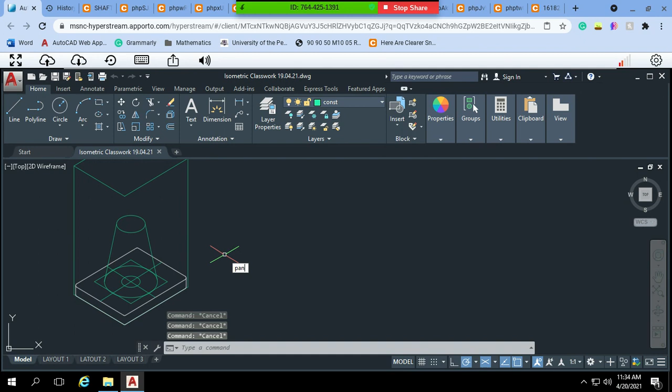Now let's look back on the question. You are to convert this image, this orthographic drawing, and here are closer images. I explained that the reason why you see me taking photos of the paper is because this past paper is so recent that CXC doesn't publish it, so I have to just take quick screenshots of their questions.

One second. Who's that? Makes sense. Yeah, that's Josh. Alright, let me put my camera on the screen, have to put it side by side.

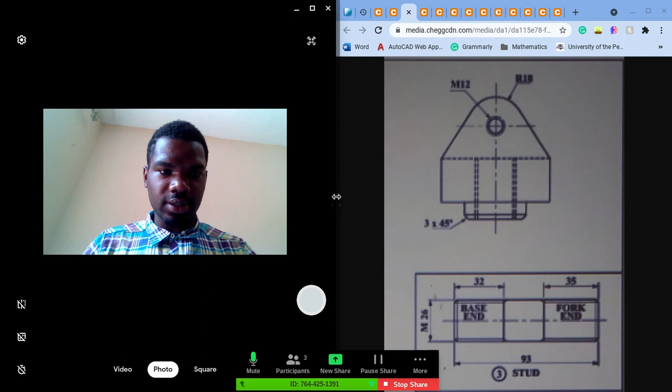There we go. Afternoon. Alright, good afternoon, Josh. How you doing today? I'm good. How are you?

I'm doing good. Let's hope that we can really reach some great progress in this drawing. By the end of the week, we should finish another coursework, which is going to be this isometric drawing. Alright, so just look at it for me.

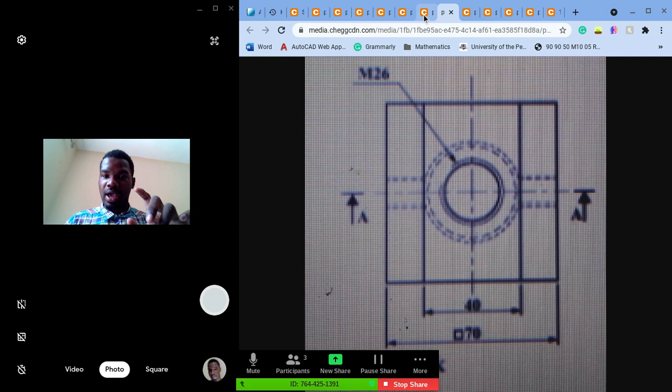So a quick correction. On the drawing, it specified some measurements as it relates to the fillet. I thought it was 3 millimeters, but it's actually 5 millimeters. So you're gonna change that 3 millimeters to 5 for me.

A simple way to just change the fillet would be for you to extend the lines back to original. There we go. Then you can delete the curve, type the command fillet, specify the radius to be 5. Now you can do the fillet once more, and you see the large difference. Understood?

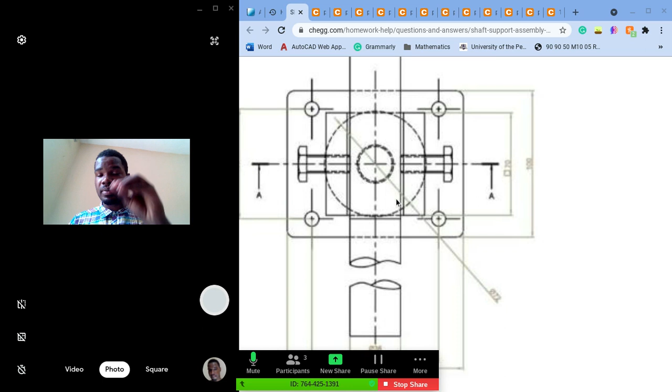Alright, so the metric of the inside is what I'm going to be designing now. So pay attention for me now. Yesterday we got the base. We said that you went 70 out on both sides. And then to find the structure, you went 40, which is 20 on both sides. And then you connected it back to the base, and that would give you this distance that you see.

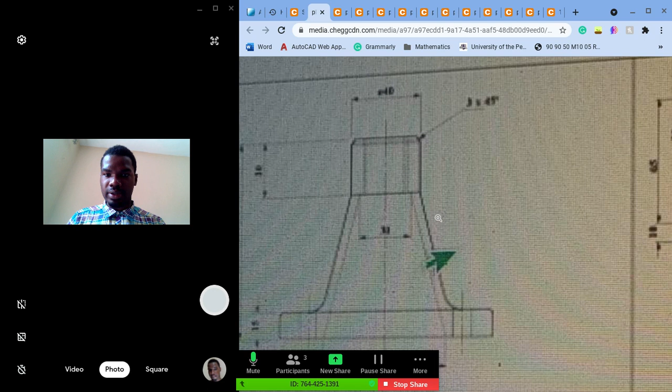Alright, so once we have that down, the next thing to design is going to be this vertical component that goes up to be, is that 16? Let's get a clear image. It's 30. So we're gonna go up 30.

Alright, let's see who's that. That is Corey. Good afternoon, Corey.

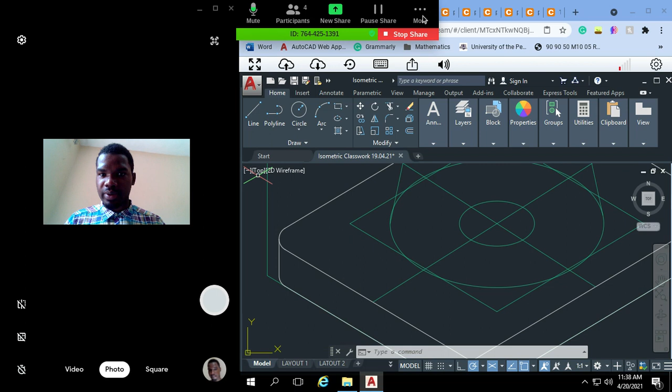So let's pan. P-A-N. Right, how do I remove this banner? I don't know how to remove this button, it's in the way. Okay, let me continue though. So PAN, there we go.

Let's zoom out. Now we're gonna go a height of 30 upwards. Line, specify 30 upwards. Okay, 30.

Okay, now you're gonna go into the midpoint of the circle. You're gonna also go up 30. Okay, and then you can just go across 15. Sorry, not 15, but the exact radius.

So what's the radius of the circle? Let's type distance, specify this point. So we're gonna go 20 on each side. So now we're gonna go 20, 20, 20 again, and we're gonna go 20 on the other side as well. I'm gonna go 20 across.

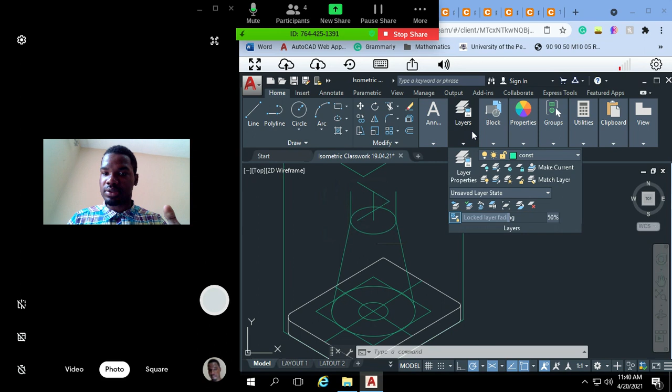So let me switch my layer. Let's just use the white line and then let's just turn off the blue line for now. There we go. But before I do that, I must transport what I did to the white line. So if you don't want to use the construction layer and you think you would go faster if you had just used one layer, then you can do that, but then you must change it afterwards. So let me just move this to the white line.

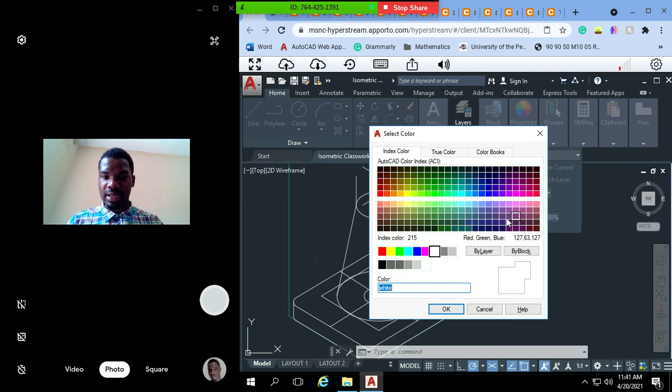Alright, now let's switch this. All you have to do is select that layer and now you can turn off the construction box. There we go. Isn't that hard, right guys?

So is everybody at this stage? No, sir. When do you want the work back? Friday. No problem, Friday. Okay. Alright, Dara.

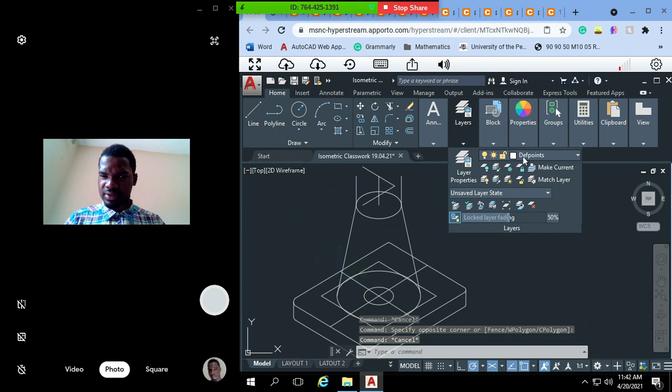Alright, for some reason I'm having connection issues because I can't select my lines, which is strange. One second, let me try to connect again. Alright, yeah, I still can't select my lines for some reason. Okay, there we go, let's continue.

So as I said, you're going to draw a box over this design that is in a radius of 40, and it has a height of 30. Let me quickly draw the box out here and then I'll place it on top.

So here we go, we're going to draw a line going 40 in this direction, 40 in this direction, 40 in this direction, 40 in this direction, and 40 in this direction. I'm going to give it a height of 30 beneath.

Alright, I'm going to go across now 40. Now all I need to do is place this box on top of the vertical cone.

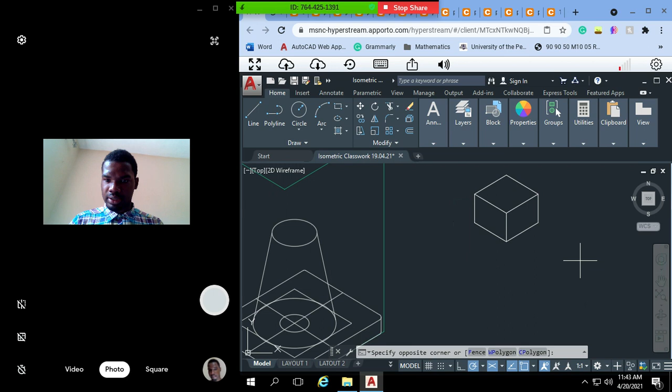Let's quickly go here, so I'm going to select this box right here. I'm going to move it, but first let me find a midpoint so I can have a base to draw with. Let me turn on the DSettings.

Is there anybody else in the room? Camera on for me, Khori. Camera on.

Let's turn on line. There we go. Okay, now I'm going to just move this entire object. Press enter.

Into the center. But you realize something, if I move it, I haven't given it its height. So what I need to do is move the base point from the base. I'm going to copy this midpoint line and place it at the base as well.

And then I move everything from this point. Press enter, select this point, and then I put it here. Any questions?

No, sir. Okay, alright, so let's look at another sketch now. So that's the overall idea, so that's the construction box for the top there.

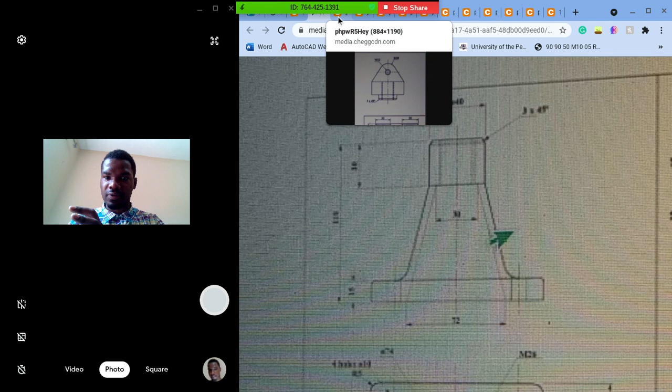Now as it relates to what is housed on the top, alright, here you go.

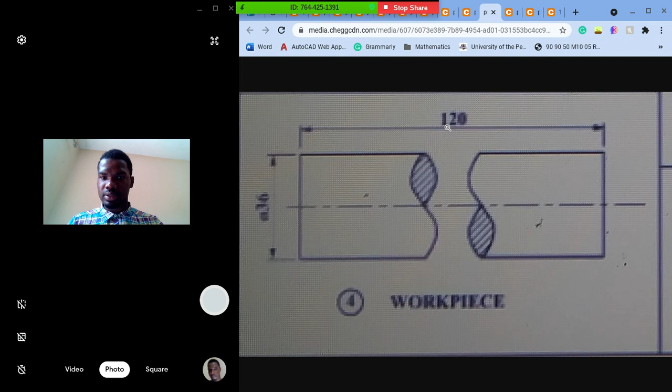Okay, now we're going to begin to draw this design. So let's start off firstly by looking at the next part. So the next part that we're going to draw is going to be the fork, that's part number 2. Okay, let's see if I have another sketch of part number 2.

Here we go, alright, so let's sketch. So what I advise you to do, Josh, Khori, and Patrick, is sketch each individual part by themselves in isometric, and then you just move each part and assemble it on the device itself. That's way easier. So I'm going to call on Josh now, and he's going to sketch this in isometric.

So I'm going to send you the link, Josh. Alright, so let's pan over. I'm going to send you the link and you're going to control my screen and tell me what I should draw, so you're going to draw on my screen. Let me copy the link.

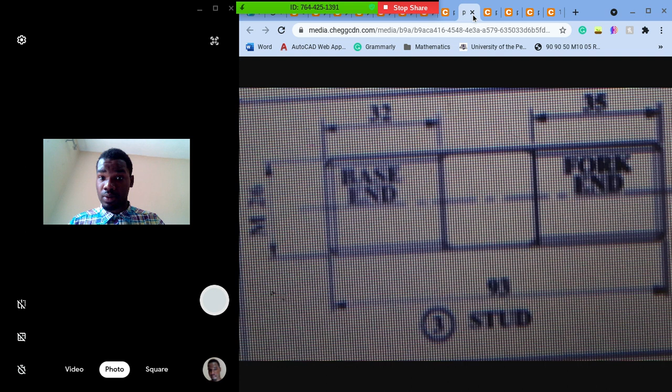Alright, there you go, so click on that link and now you're able to control my screen. What I want you to draw now, you're going to draw part number 2, which is right beside there. This is the front view, and this is the plan view. Draw this part 2 in isometric for me.

Josh, are you there? Yes, sir. Alright, so are you on the link now? Sure. Good afternoon, Zachary, are you on the link? It's loaded. Oh, so I just sent a link for Josh to control my screen remotely. There you go, he can control it now.

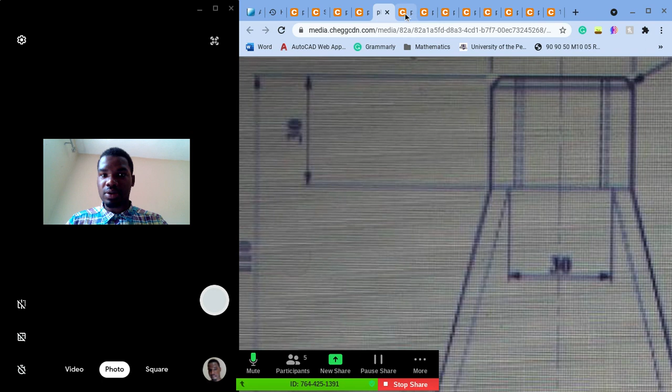So you should look at this sketch that you see above here. You're going to use this sketch now of part number 2. Where is it? Right here. This is the front view, this is the plan view. I want Zachary now to quickly sketch it and Josh to draw it in AutoCAD.

Draw what, the whole thing? Okay sir, yeah, I'm going to get a piece of paper and sketch it, sir. So Josh, just to make it clear, you're going to be the one drawing it, and Zachary's going to be the one telling you what to draw, because he's going to sketch it for you. Clear? Wait.

Okay, I don't really get it, but okay. Wait, do I have to use the 3 views of this thing?

You could sketch the isometric based on the 2 views here, because you have the plan view and the front view. That's typically another question CSEC would give you: 2 views, and say freehand sketch it so you can know what the end view would look like.

Okay sir. So let me show you the method I typically use when I don't have time to really sketch the third view, because you need it to see the object, but typically you don't. What you can do is begin to sketch the details you have from the plan view.

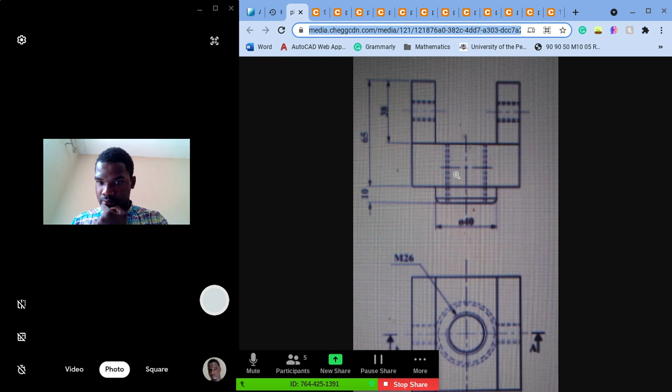So what does that mean? That means there's a cylindrical hole on the base right here, do you see that? Josh? Yes sir. Right, so if there's no circle right here, that means it's going to have two vertical standpoints with a base, and a circle in that base going down. That's basically what you have there.

So what you can do while Zachary is sketching the third view for you to see - he's going to send it in WhatsApp so you can look at it - but while he's doing that, let's start off quickly by just going to our construction layer and sketch it out for ourselves. Here we go.

The very first thing we have to realize is that we can know the width and the length. So what's the total now? Let me move this up. There you go, we can know the total width of this object. Let me just quickly check if it is there. No, it is not there. Let me look at another view.

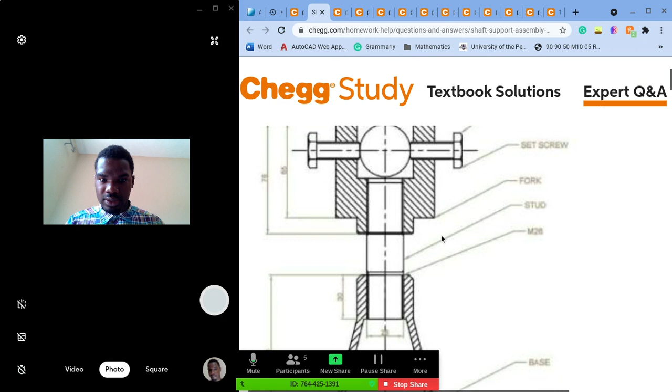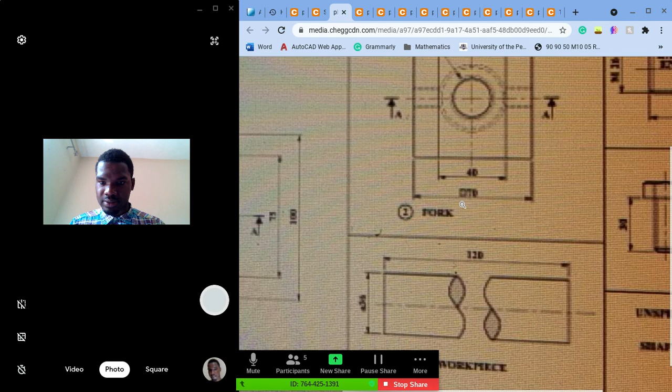One second Josh, let me look at the width for you. So here we go, these are the measurements we are given. Let me just look at the width for you. So here we go, this part was cut off, my bad. So you see this? It is 70, alright, so we know the width is 70.

And we can use that now to begin to sketch it in AutoCAD. So let's use this now. Tell me, what's the first thing you would design, Josh? I'd start from the bottom, go up. Alright, so you would draw what exactly first? What's the best detail for you to start from?

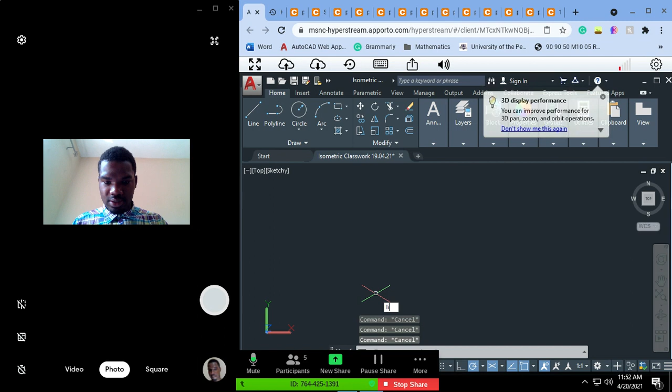You can go for a pencil and paper just to sketch it, alright, but here's the beauty of AutoCAD - there is a sketch feature. So when you're drawing your lines now, it actually looks like a sketch. So it doesn't have to be perfect, you don't have to use perfect measurements to get your sketch, you just need to form out the idea. So let me give you an example.

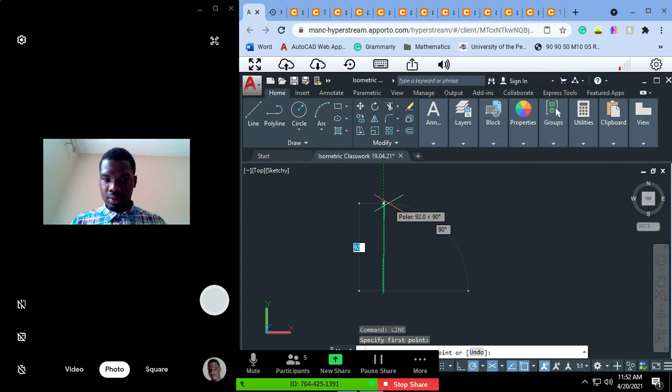Alright, I know there's going to be two prongs going up. I'm going to just quickly sketch out those prongs. Here I go. One prong going up, it goes down, it comes down, it goes across a little bit, and it goes across a little bit, and it goes here, alright, and it goes down.

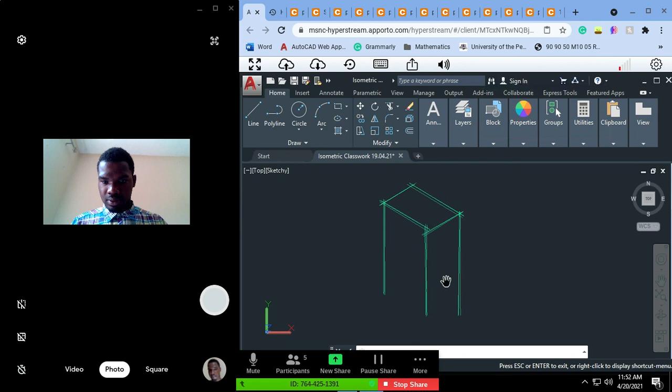Okay? Oh, I thought it was supposed to be properly drawn. No, sketch it. Right? Yes sir. So look at that, that's supposed to be like a triangle, so how would we know that?

Because in the end view, it's like a curvy triangle thing. What's that? This, look at the end view. Oh, Zachary's picture? But like, when in the end view, it's like, it's this, it's not a square. Which end view are you referring to? There's only a front view and a plan view right here.

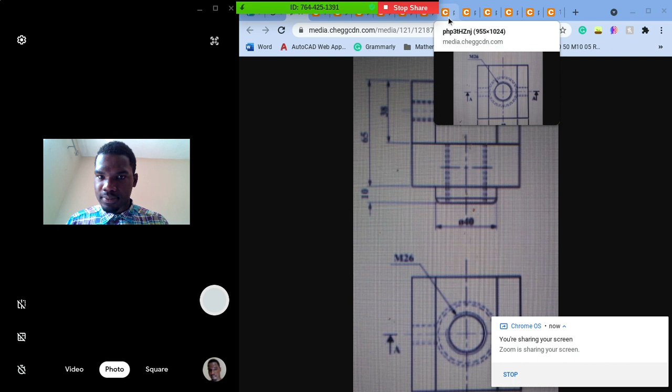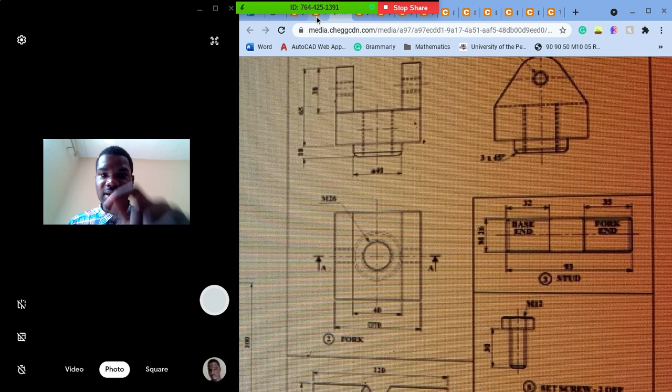If you look at the end view they gave us - wait one second, let me look at the... I know what you're saying sir. Yeah, that? No, this is a separate... this is, oh yes, this is the end view. You're right, I just realized as well. Right, this is part number 2, my bad. So that was cut off because when I was looking at the other view to draw it, I only had this - I didn't realize there was a second end view.

So you have every detail then. So that means, Josh, it's gonna be a curve, right? Exactly, it's gonna be a curve. My apologies, I didn't realize that. What exactly do you have to do, sir?

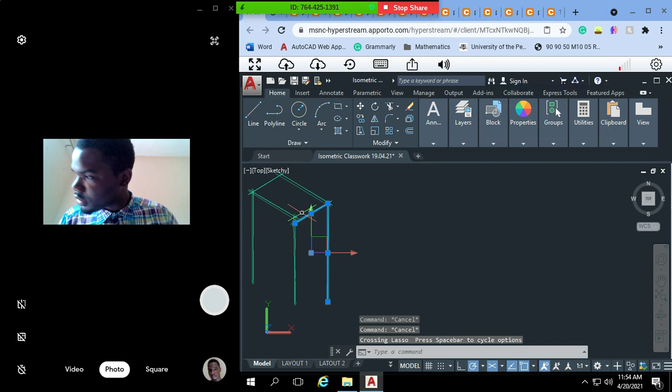Can you repeat that? What exactly would we have to do? So you should be starting your isometric sketch, and the first thing I said is to make it easier for you.

Yes, confused, sir. All right, hold on, let me send you the picture.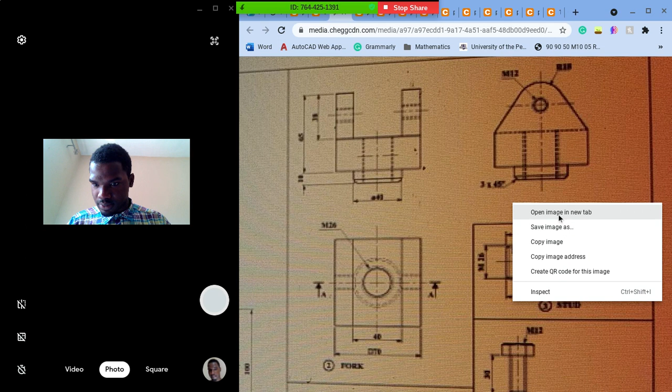Wait one second, Zachary, look at this image as well. This image has the end view for you to look at. So all you would do is just put the curve on your sketch, Zachary.

But Corey, what I was saying is that to make it easier on ourselves, we're just gonna draw the isometric of each part and then assemble it together to make the design.

Oh, okay, alright, so we're drawing the assembly now. We're drawing the isometric, and Josh is gonna sketch it for us quickly. So he said it's gonna be a curve on both sides, and it's correct.

I didn't see that detail until just now. Wait, so should I sketch it or should I properly draw it? Alright, since we have the 3 views, we can draw it actually.

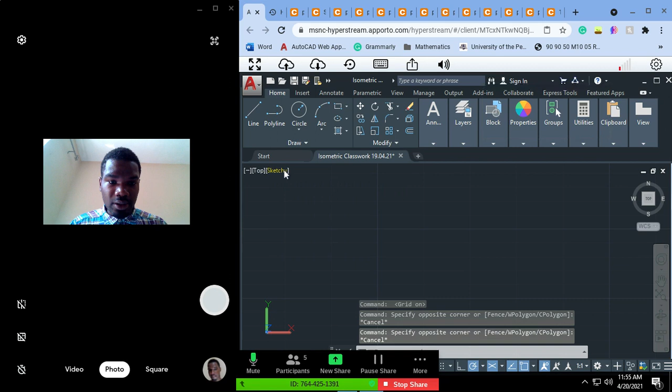So let me convert back to proper lines. One second, let me go back to proper line. So if you want to sketch in AutoCAD, you just simply need to go to the top, and you're gonna go back to Sketchy or 2D wireframe. There you go, so you can draw it normally now.

Alright, so he's starting off with an isocircle. He's starting from the very base.

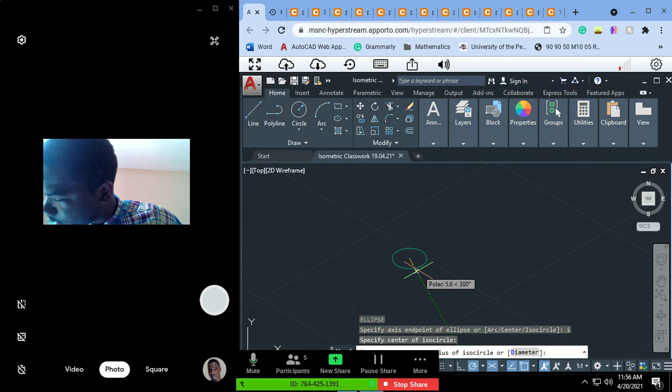Now remember the image is... Repeat that, can I see the picture again? Sure, alright, one second, here you go.

So the diameter of the circle that you're drawing right now is 26. So it has a radius of what? Because we only use radius when we're drawing isocircles. What's the radius? Oh.

Corey, if the diameter is 26, what's the radius? A half of 26. So how do you delete this? Wait, let me check your drawing.

Oh, how do you delete that? There you go. Okay, there's the EL and... mm-hmm.

The base, so sorry, it would be 13. Repeat? The base is 40, right? Mm-hmm.

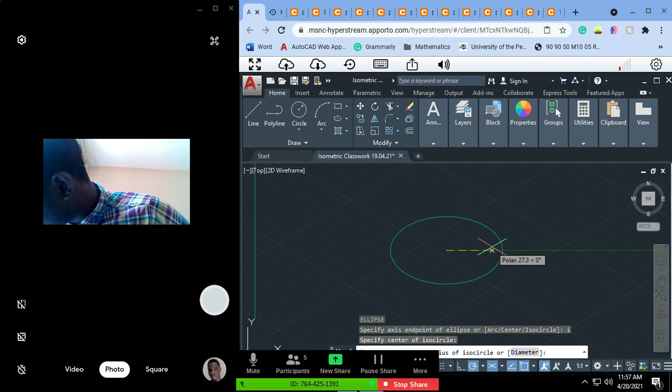Wait, let me check to verify that. Hold on, let me check.

So the base, there's 2 bases. There's one with 70 and there's a smaller one with 40. As in the one up?

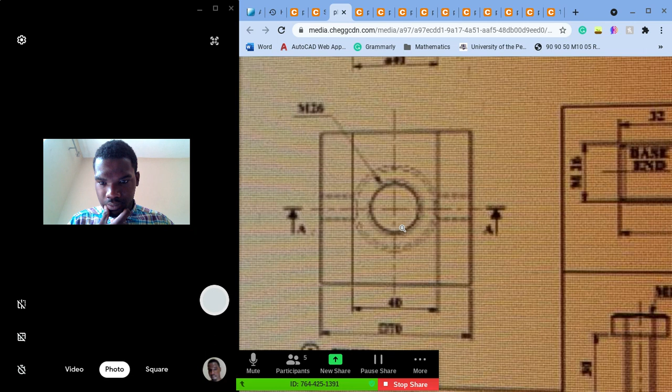Oh, okay, yeah, mm-hmm. And then there was when there was the other one, like that was below it.

So look at it, the 40 that one you're referring to, that's gonna be right here, and the 70 is referring to the housing, which is the prong. Alright, so there's a little small attachment below everything that has the 40.

See that? So it's a diameter of 40 right there. So do I have to do this?

Wait, let me check your drawing. Down, oh okay I see what you're doing. You don't have to do that, because what you're gonna have to do is simply let me look at it.

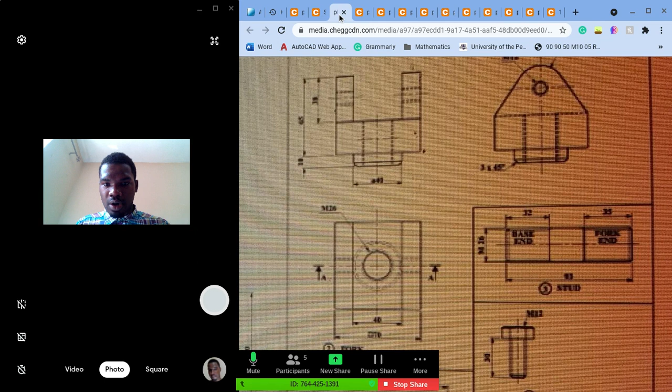And I'll tell you how you're gonna do it. You're going to really have the larger circle diameter, right, and then a smaller one going on the outside, not the inside.

So for yours, for example, this, which one is the 40? The 40 is the bigger one. Right, exactly, so for one moment, one second, let me show you something.

This circle is sharing the same diameter as this one, right? Okay, so what you should have done... it's different, isn't it? Because it would be like 6 less.

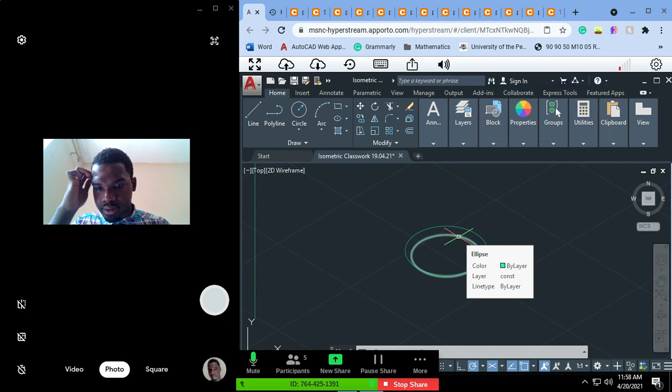No, but it's sharing the same center point, right? Yes, sir. So if it's sharing the same center point, the measurement for how much you would go down, right? Typically it's 3 millimeters.

Right? Yeah. So this, it says on the end view that it... wait, what does that say, sir? 3 times a 45-degree angle.

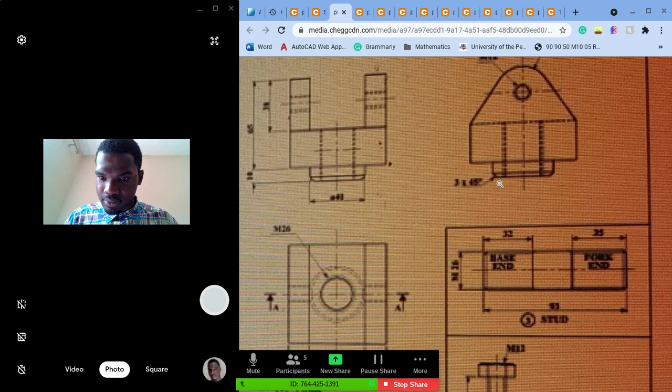So you're gonna go down, yeah, it's a 45-degree angle. Okay, so what that typically means is that you're going to now have a smaller incision, right, that goes down a 45-degree angle, and you can find that measurement by just drawing a line.

So look at this one, Josh. One second, we're just gonna draw a line that has 40 millimeters. Then we're gonna go down and draw a 45 degree line.

So you're gonna press tab and snap it to 45. Then press tab again, and you're gonna draw 3. There you go, and now you can measure what this line would be.

So now we're gonna draw the same thing on the opposite side. We're gonna go here, and then we're gonna snap this one.

So what is 45 degrees in the opposite direction? Isn't it going to be... what is 135? Yeah, 135, let's snap it to 135.

Alright, and let's snap it again to 3 millimeters. There we go, so this distance is going to be the diameter of the next circle. Let's measure it.

And that's going to be 35.8. So the diameter of the smaller circle, Josh, is going to be 35.8.

So draw a circle of 35.8 with the same center. Let me show you, I'm going to go from here. Let's just delete this for a second. You're going to select ellipse, same center point, specify 35.8.

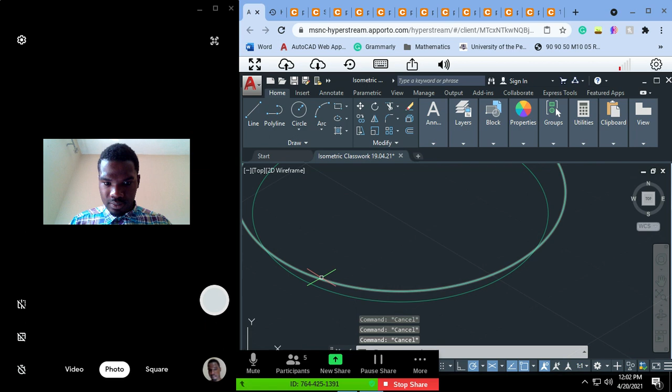Okay, so what you can do now to get the line correct, let me just quickly measure it and see. Yes, it's 3 millimeters. So what we can do now is draw a line straight down.

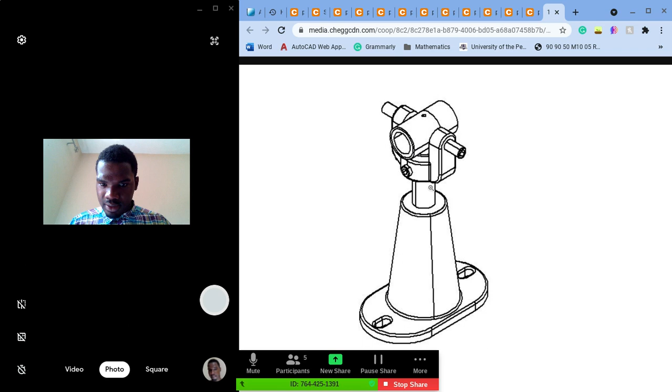Wait, I think I had a sketch. Where's the sketch? One second. Alright, so where's that part? For the base, here we go. So the base is right here, but the sketch is very blurry, so that's why you might not see it. So we can just trim this out.

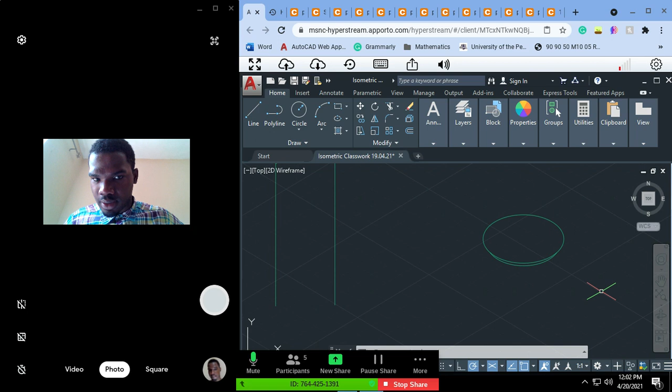Alright, so for now just keep that in mind and continue drawing the other sections, Josh. Okay, let's try again. Alright, so what's the next part you're going to draw? Let's look at it.

Now you're going to draw now. After you have that base of 40, you're going to go up a height of how much? Let's look at it, that's 11. Is that 11? Let me get a clear image. One second.

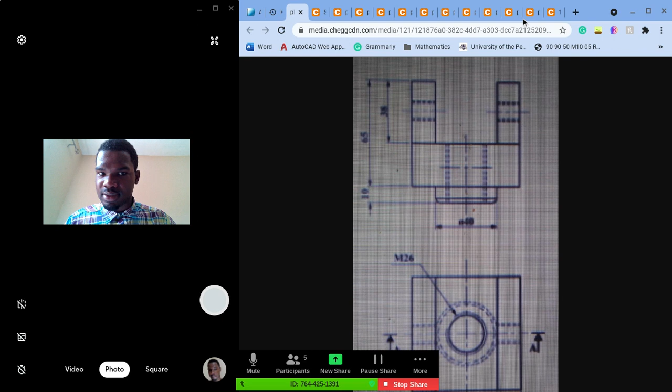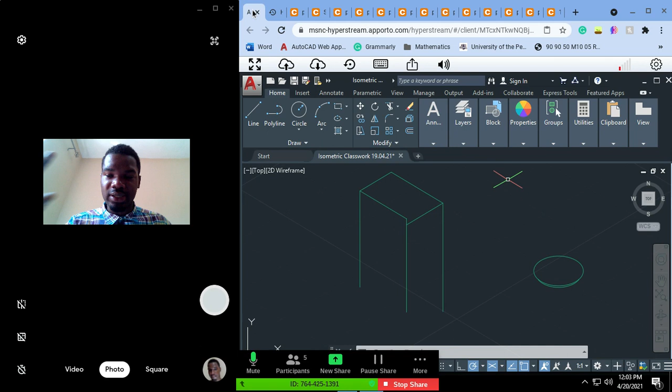That's 10, that's 10, right? That's 10. So my apologies guys, but this is the best I could do. CXC will never, you will never ever find a past paper booklet for TD, mechanical engineering, or building technology, because these subjects tend to repeat questions, right? Because I have all the questions, but I can't screenshot it. They have a software where you can only view it perfectly on your laptop, but nobody else can either screenshot rather than just take a picture. So that's what I did. But when we have marathons though, I'm just gonna connect a projector to my screen so you can view the drawing details perfectly without a screenshot.

So that was up by 7, right? Wait, let me check here. So hello, can you hear me? So you're gonna go up 10 first. Gonna go up 10.

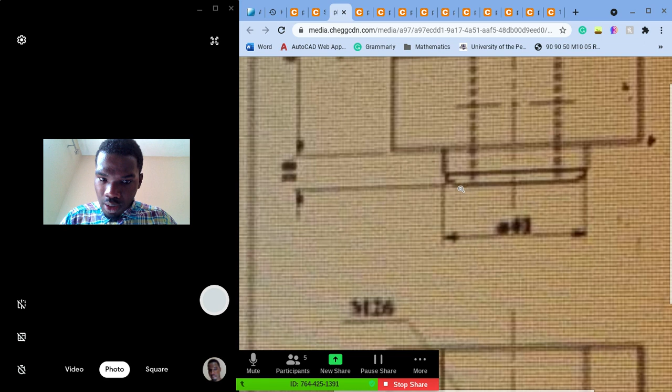Doesn't the 10 include the bottom piece, which was 3? No. Oh 7, my bad, 7. Right, the picture is so blurry. One second, there we go. 10 subtract 3, right.

Go up 7, and then now you begin to go up vertically 65. Wait, the thing isn't like snapping, sir. Hold on, let me turn on quadrant. There you go, try again.

So you're gonna go up 7. So what I would think you would have done is just to go up. Let's draw another circle and go up the same diameter of the 40, because that's what it really means for you to do. So just copy that from the base point and then go up 7. Go up 7, right, there you go. Alright, I used to think like that too when I was doing this. I always used to draw the line first and then I drew the circles, but it saves you time just to have the circles. So good.

You can start to see the design coming out. Let's continue now, the next thing you're gonna draw for me. Can you repeat that? Should I trim now? You don't have to trim now, because if you begin to trim now, you could have saved the time when you have finished everything and then you trim. Because all of those are construction lines.

We haven't even drawn our main lines yet, so don't delete anything you see there. Those are construction lines. Alright, the next thing now they're going to draw is that from the center point, you're going to have the block going out 70 millimeters. So you're going to draw a square on top of that now with 70 millimeters all around.

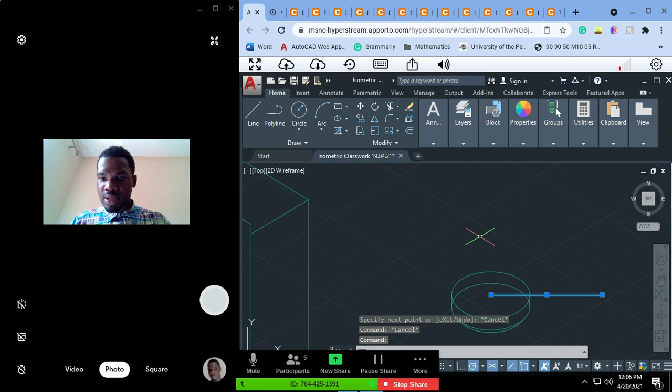So a quick little tip, Josh. What you can do, draw the box outside first so you don't get confused. So undo that. Yes, so draw the box somewhere out here and then you place it on top of that so you don't get confused.

Okay, how do I delete this, sir? So you press the line and then you just press the delete button. One second, one second, let me just do it. Press the line and then you just press the delete button. Pan over here and it's gonna draw the box now.

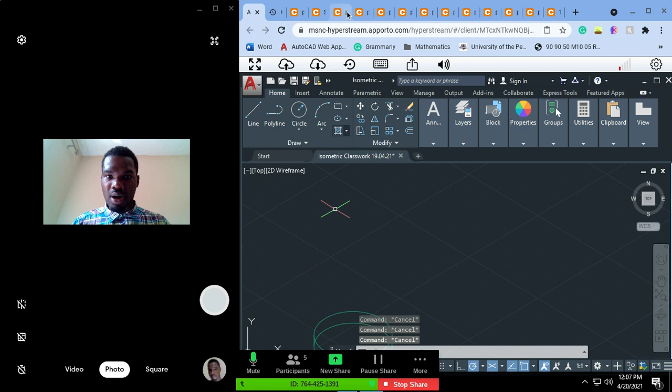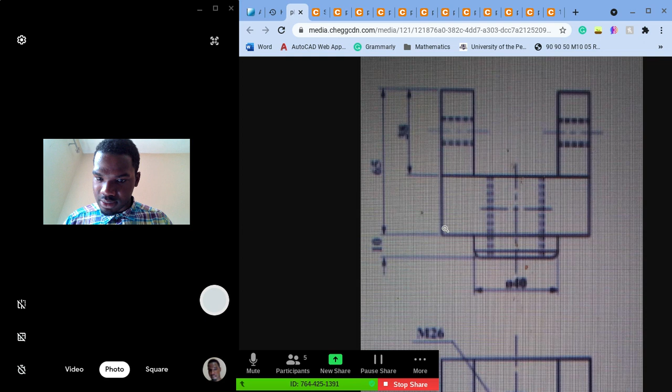So the box, it has a height of, what is this measurement? It's so blurry, one second. Let's go to another one. So it's 65 minus what? 35? What, so 65 minus, so the box right here, this distance right here, yeah, 30. So it's 30 by 70. Okay right, 30 by 70. I don't know how you guys see so well, my glasses are failing.

So let's draw the box out here. You're gonna go 30 by 70. So the square is 70 by 70, but you're gonna give it a height of 30.

Are you sure you're in isometric? Hold on, that doesn't look like isometric. One second. Yeah, there you go. Should be 70, and continue now.

70. Excellent. And then you're gonna copy that line vertically upwards 30. And that's your box. Oops, my bad.

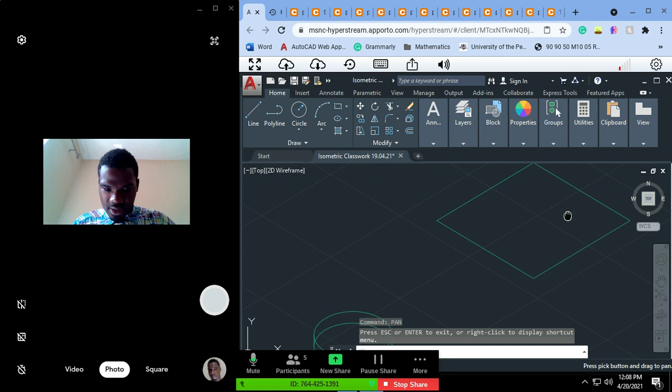I didn't realize I was on the screen. One second, let me zoom out for you and try to find where your drawing is. Where's the drawing? Oh, there we go. Here we go. Okay, yeah, there we go. You can continue now, let me just check who's here.

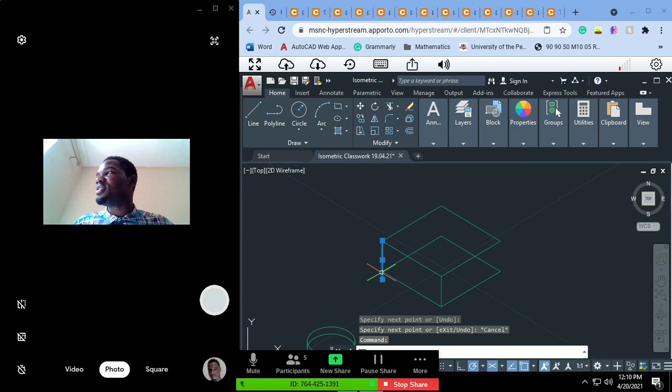Alright sir, thanks. Because really and truly, I'm gonna tell you something. When I was doing TD, rarely did I ever leave the TD lab because it was a lab, right? I would buy lunch, sit back down, eat my lunch and do work. I'd have my break in there while doing work. The only time I'd leave was when I had other classes. So it's very strange we only have 45 minutes, because I spent like probably 2 hours every time I had TD in that lab.

There you go. The fun part of this, Josh, is when you're finished and you're gonna be trimming out everything, that's the fun part. So just move this box now, draw the midpoint line, and you're gonna move that on top of that cylindrical thing that you have there.

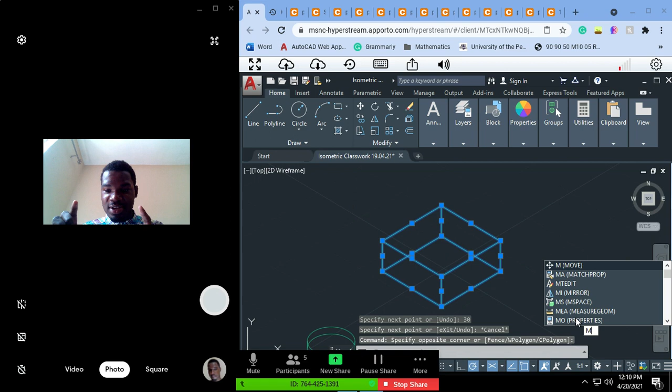Wait, you're gonna run into some problems, so let me help you quickly before you do that. So firstly, a quick tip: if you're gonna be moving something to place on a center, you need to find the midpoint of this thing. So let me show you, you're gonna firstly go type line, find the midpoint, then go across, because the center needs to be found of this base for you to put it on the top of another center.

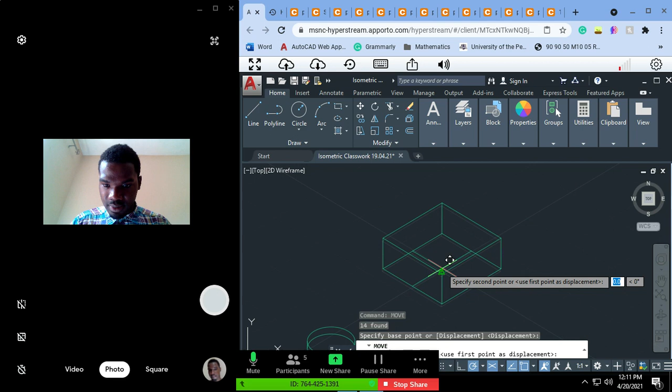So we're gonna go here now, select everything here, and then move this from the center point to the center point of this object. Let's move it across. Okay, pan. Alright.

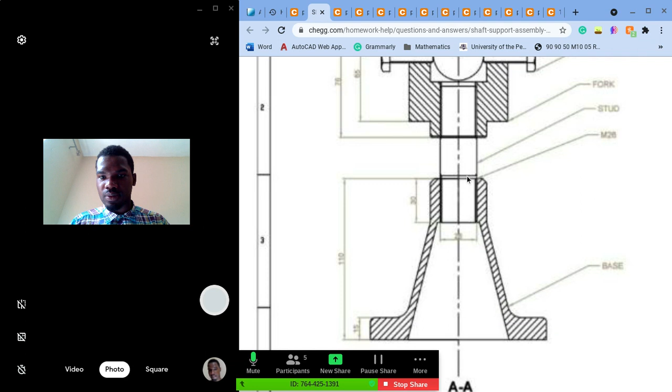Now, I think there's an error right here, let me just quickly check. The height. Oh, I know why. The reason is because if you look closely, this stud should go up vertically, and yes it does house everything in it. Do you see that? So it should cover everything wholly. The only thing you're gonna see, that little circle behind it, is when you turn it over. But based on this, it does cover everything.

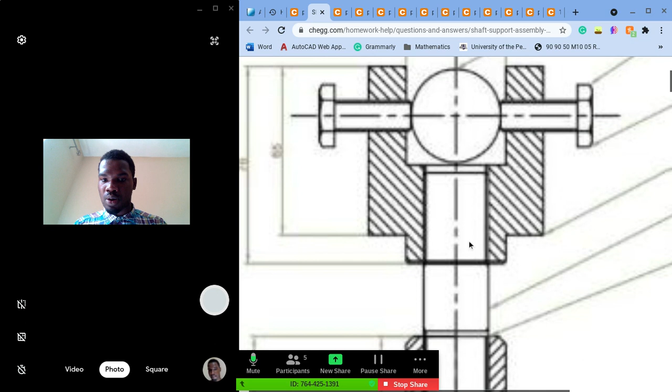So continue for me now, Josh. You're gonna now go up. After you draw the distance of 35, you're going to continue now going up and finish that design. So let me tell you the distance: 35 up as well, so continue drawing 35 up.

Wait, before you draw the distance across, you can just find the distance you will go across from this. So what distance would you go across to find the curve? I mean the width rather, the width of the curve right there. Let's look at the end view, let's look at the end view.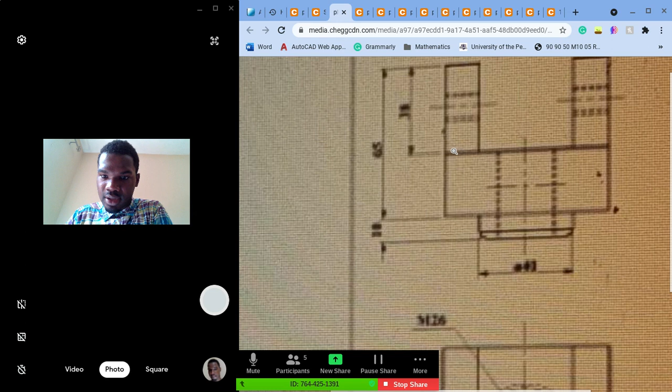So the curve is going to be, that's so blurry, but the curve is going to be at a width of 70, minus 40, and then half of that on both sides. Everybody see that? It's going to be 15, is that correct? So what I'm suggesting you do is, just while you're doing this line, you just go 15 across.

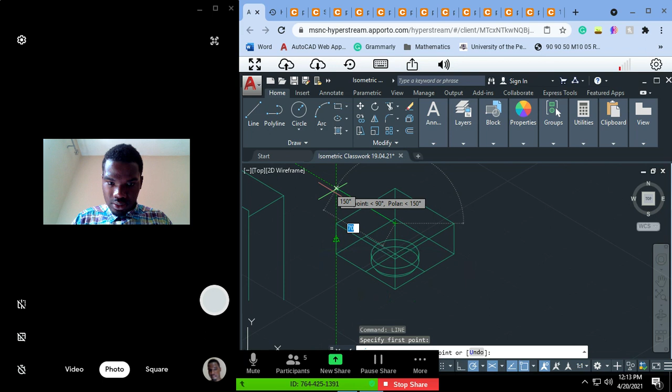So you're gonna of course do this. One second, this is what we call polar tracking. There we go, and then we go down. You're gonna just go over 15 millimeters. And you know this is gonna be the box for your curve.

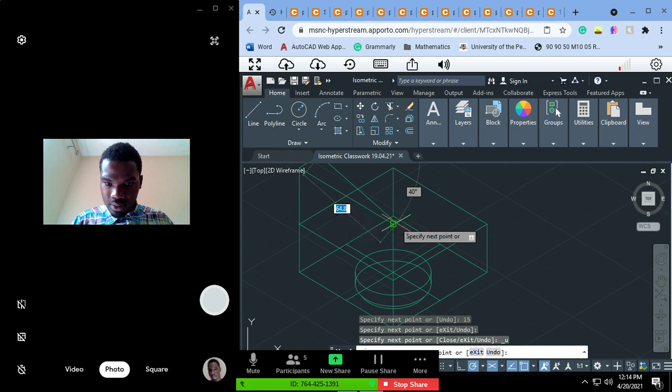One second, let me zoom in. Oops, meeting ended.

Alright, so you're going to go 15 across. I'm going to continue now, going down. This is a part of TD a lot of students love because the intricacy happens. Now when you have this part, you're going to get the curve for the base. We're going to type ellipse isocircle.

We're going to specify the midpoint to be here. We're going to specify ellipse isocircle. Let's change the grid to side, instead of top, let's put it to left. Here we go, ellipse isocircle.

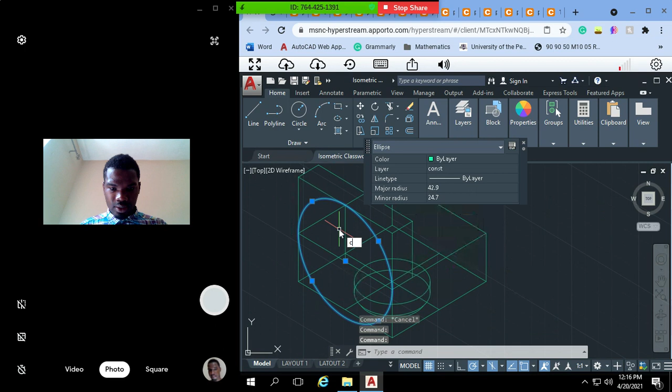There we go. And we're going to specify this height. Copy it, and go out a distance of 15. And then we're going to trim it.

So that is so beautiful to me, I don't know why, but that is a beautiful part of TD to me. Because now what I'm going to do, I'm going to draw over this and put in some mainline details. I'm just going to continue this because I realize nobody else is rejoining, which is fine, probably have another class now. So I'm just going to continue drawing over this.

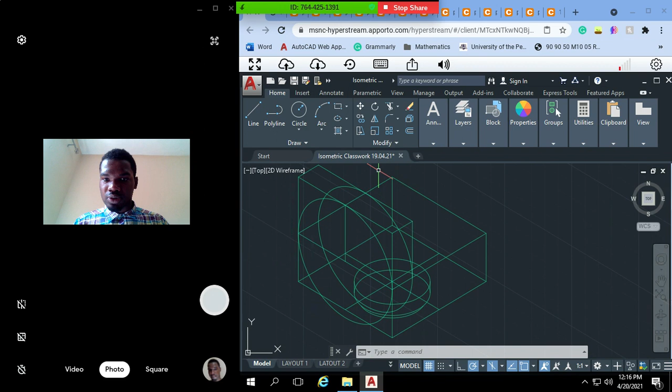Alright, let's now draw over this with our main line. Go to object, and I'm going to type ellipse isocircle. Specify this point, there I go. I'm going to trim to this point.

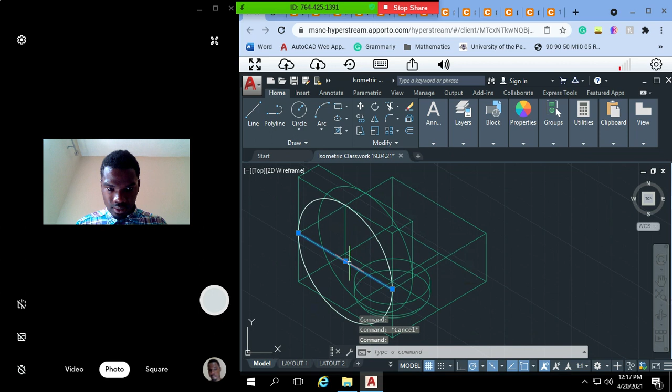There I go. And I'm also going to copy this to this point. There I go. And then I'm going to trim this now.

Alright, draw a horizontal quadrant line, connect them. I'm going to zoom in. I'm going to now trim. There we go. Alright, isn't that the most beautiful thing you have ever seen? That is the beauty of technical drawing.

Right there. So what I'm going to advise you to do now, because this drawing is symmetrical, we're just going to copy this entirely. Maybe you're saying, sir, how are we going to find out the lines? Here's what we're going to do.

Select them singularly. There we go. We can press shift to deselect a line. So I don't want to select that one, I'm going to press shift. The plus tells you when you're adding a line to the selection, and the minus tells you when you're subtracting a line from the selection. So there you go.

Subtracting, adding. Alright, and then I'm going to copy this. And now from the base point of this edge, I'm going to copy it to the midpoint of the entire drawing, which is here.

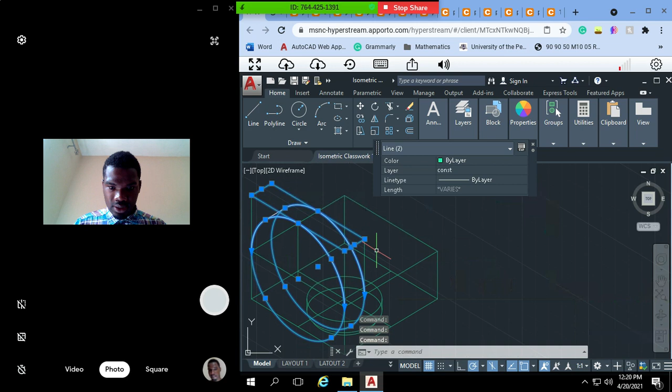So this is the detailed way of getting your drawing, but however in the exam you must decide the most efficient way. Alright, so let's copy this line, and now we're going to copy it from this point and paste it here. There we go.

Now I'm going to ask you one more time, isn't that the most beautiful design you have seen? Alright, so we're going to continue from here. I'm going to save this drawing.

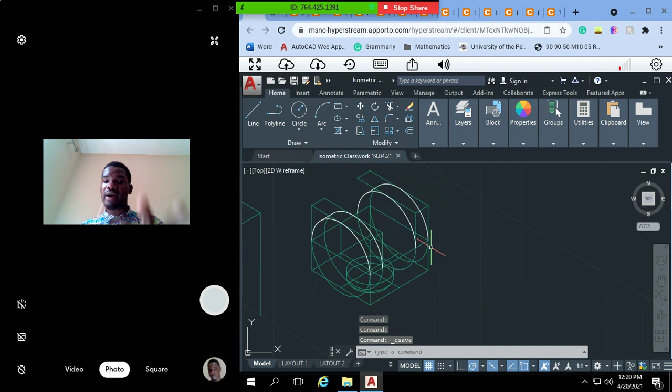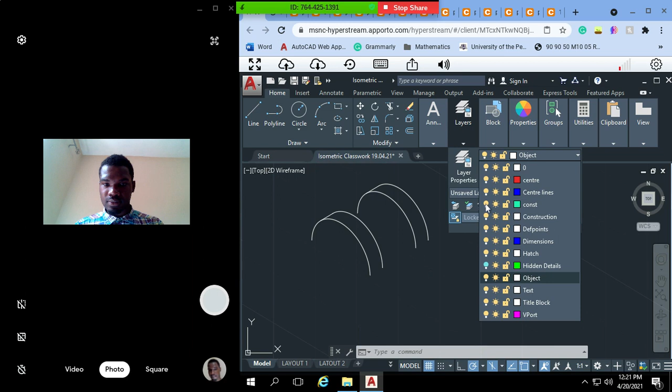Now, just to make sure you aren't confused, let's turn off the construction layer and show you what we really have. One second. So this is really what we designed today from all of that line. Alright? That. Okay, and obviously the base as well.

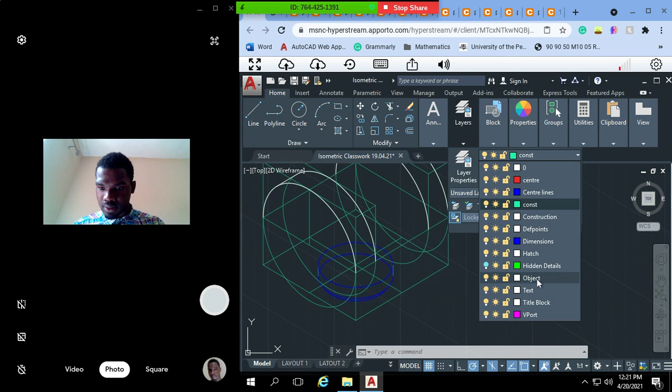We're going to change this to our main lines. So let me put this quickly in our main lines. Let's convert it to our main lines. So go to layer, let's go to object, and then now let me show you what we designed today.